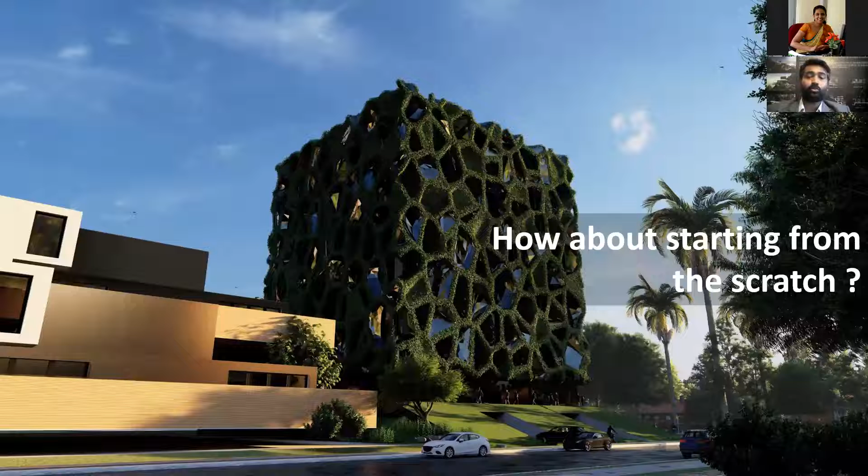That is a question for us to answer. We think as designers, we can start things from scratch if it's a new plot. But when it comes to an existing building, you just have to develop a new concept for it. But somehow you need to think again from scratch. Otherwise, we will be supporting the same system, same strategies and technologies that run us down and create a lot of issues in the future in terms of urban areas as well as cities. And also, there will be no solution for the climate change issue as well.

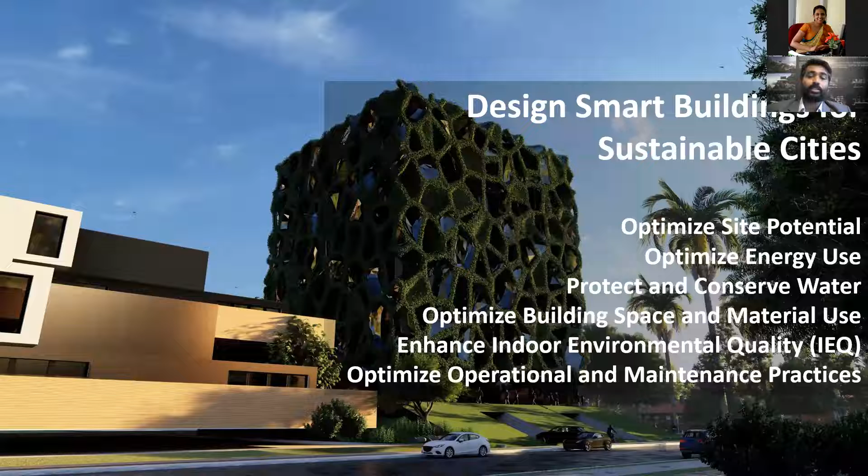These are some smart buildings, designed smart buildings for a sustainable city. These are some of the ways that you can just try them, strategies that you can follow. And I would explain a couple of things with some examples as well.

When designers take a site on as a project, these are the things they have to do to make that project a sustainable and a smart project in terms of it sitting on a sustainable and smart city. Otherwise, the city can have all this infrastructure which is very smart, but the buildings themselves are not smart enough to handle them. The pollution and all these things will again occur, and life inside a city would not work.

So when you start designing, or when you're just trying to alter the current situation of a city, you have to optimize the site potential.

That is very important. The site potential, in the sense, you need to think of the orientation, where your country is located, above the equator or below the equator, how the sun works, and from which months you're getting the most sun and heat, from which side, how do you cut them off, how do you allow natural sunlight to come in - we call them passive strategies - and how do you get natural ventilation to come in instead of having air conditioning all the time. Those things we need to think about.

And optimizing energy use is something we really look into, because we consider some cities which are growing use very little energy, but the cities which have grown use many times more energy than the small cities, in their one day's run.

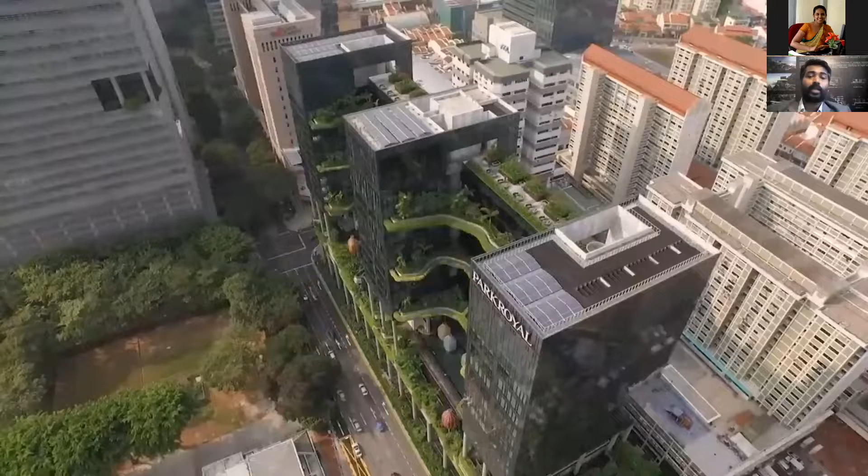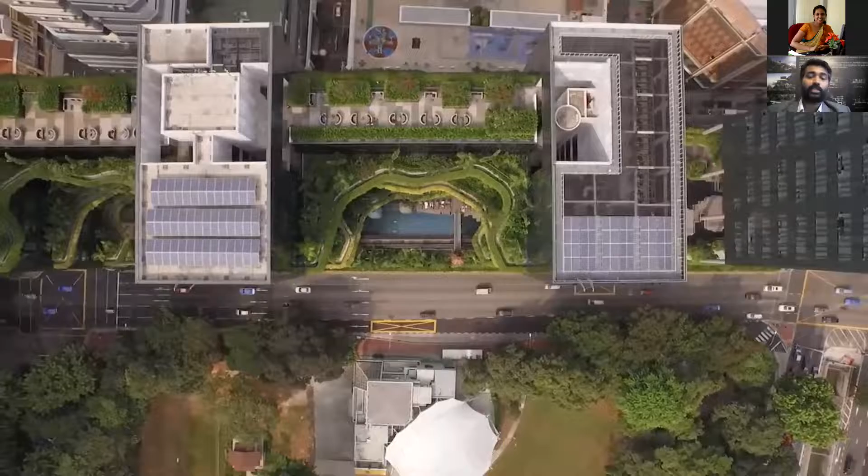The biophilic concept is attaching all these biological and bio-related matters into the building, facilitating them inside the building without removing them or keeping them away. By doing this, you can save a lot of energy when shading the facades, and it gives a lot of mental relaxation for the dwellers, as shown by researchers done around the world.

And you can always go for renewable energy, as shown here. One of the most important things is that the building should not work as a wind barrier. It should let the wind flow across the cities so it can take the heat out of the cities, from one space to another, and utilize the city spaces as well.

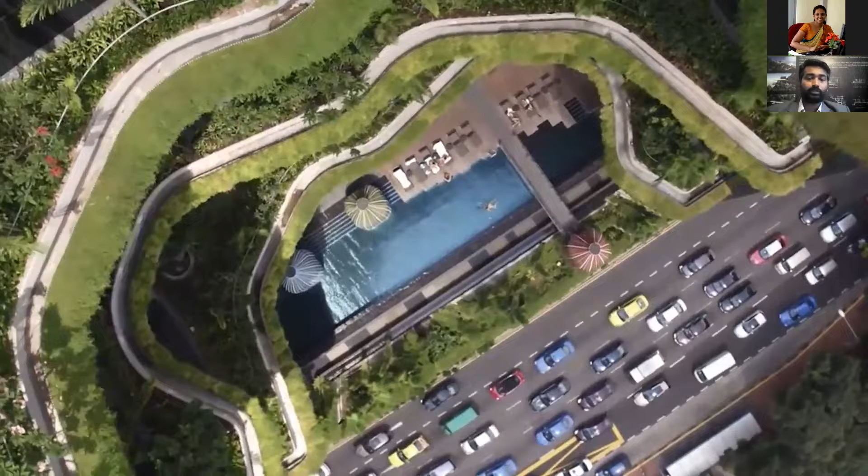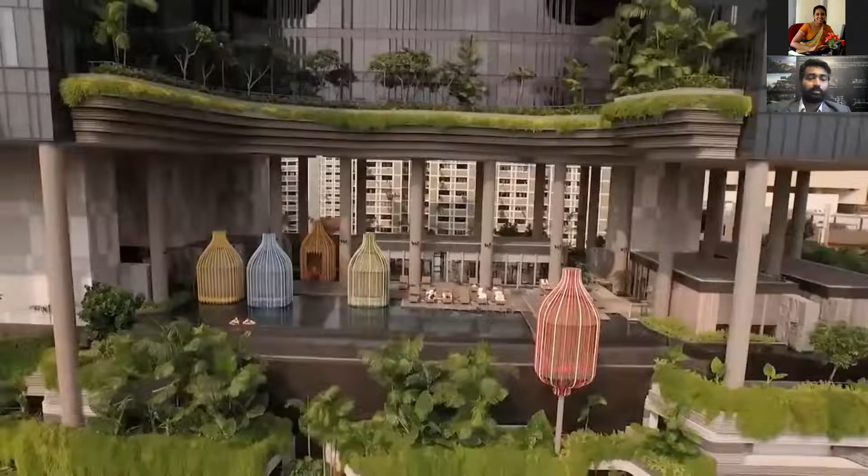So you see all this wind which could flow through the building structure, and that will ventilate it automatically - that's a passive strategy. So the building doesn't have to be fully air conditioned.

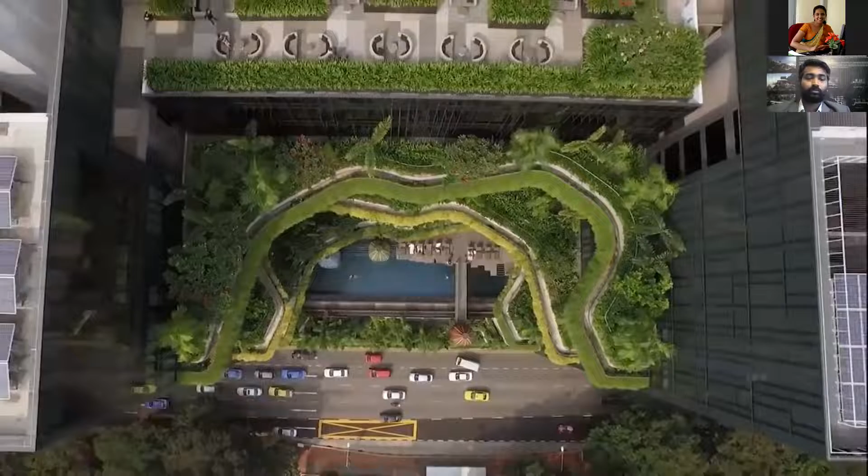Well, I'll move to the next way of approaching the same optimizing of site potential, which is biomimicry. Biomimicry is where we imitate nature, see how nature works, and try to go with the natural process.

Why do we have to do it? Because nature doesn't have any waste. Nature solves all its problems by itself. That is why engaging with the natural process is very important.

The reason why I wanted to explain about World War II and all these historical things is that when people started breaking away from natural connections, problems started because we didn't know how to engage with the natural process and make ourselves part of nature. So we created a lot of waste and issues by ourselves which we cannot solve, and nature cannot support us to solve either. But if we try biomimicry and biophilic concepts, nature can give some support for our cities and buildings to survive and eliminate climate change causes.

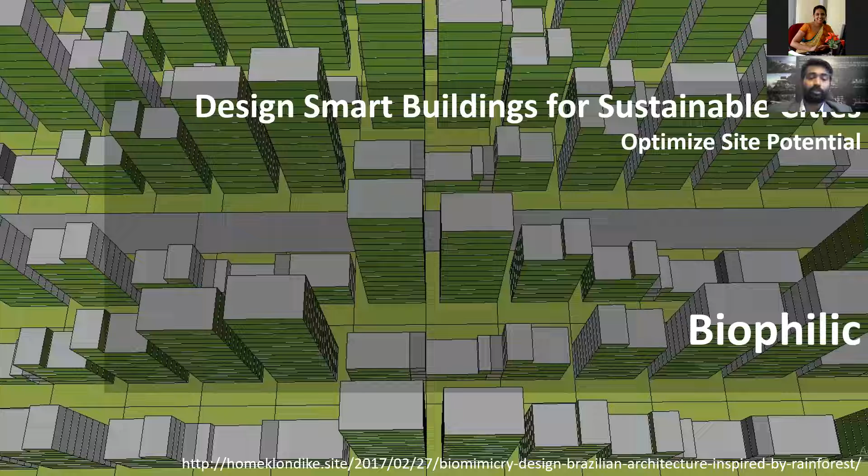And some more examples through biomimicry. As I explained, nature uses only the energy that it needs. That's very good, because if you follow nature, we can get things done with minimal use of energy. Nature fits the form to the function - there's no excess. Nature fits exactly for the function and gets it done, and it's very efficient because of that.

That is why biomimicry is very important to us as designers when we design buildings. Nature recycles everything as well - it doesn't have any waste, it recycles itself. Nature banks on diversity, it supports diversity, and really lets the lives be dependent on each other. Nature demands local expertise - that means nature tries to work out with what is available around and how it can survive by itself. That is why different ecosystems are different in different climate regions.

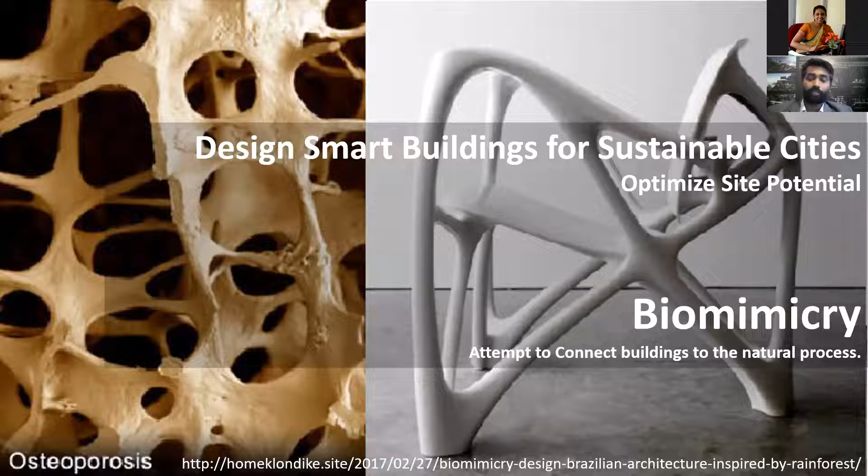These are different technological advancements from research, where we identify a whale which, despite having a huge weight, can move through the water with those two little fins. That means those fins and their design are really efficient, so you can use that design for regenerating energy using wind, since wind is also a fluid, as we consider in generating electricity through windmills.

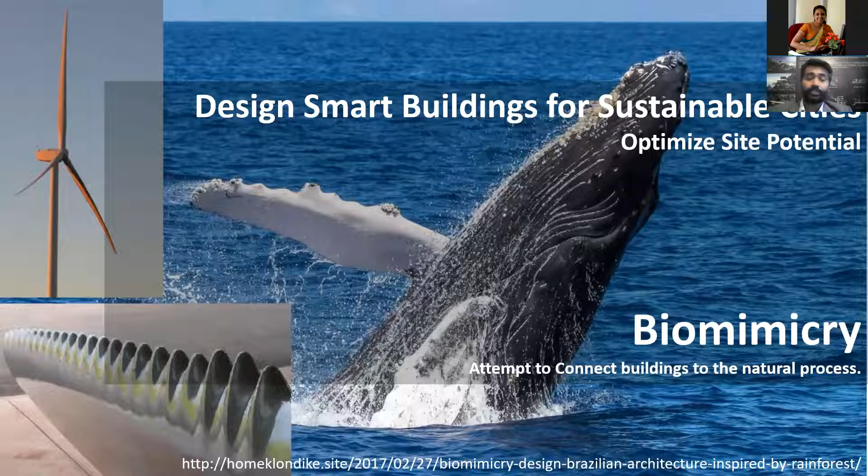Optimized energy use is understood in different ways. Energy gain needs to be minimized first, because windows and walls are the prime sources of gaining energy into a building, and buildings get heated a lot if exposed all around to the sun. That's why high rises have huge energy issues, consuming a lot of energy, and if you put glass all around it, it creates a greenhouse effect and heats inside spaces, requiring heavy investment in air conditioning. So you need to think of optimizing energy use as well.

To improve energy efficiency, different things are done in different places on earth. In Germany, I have seen an example where they used geothermal energy: they dig a well down, pump water down to get it heated, and bring it back up. In another building, they send water down in the summer and bring it back up in the winter, cutting down energy loads in winter when a lot of water heating is needed.

Optimized energy use can also be understood through different facade designs. This building is by UNStudio, and there are buildings in the world where the facade fenestration, the size of the opening, and the shading can be controlled by a centralized BMS system. That system lets the building know which facades to open in the morning and which to close in the evening, getting light and ventilation from sides where direct sunlight isn't coming in, to cut down the heating load.

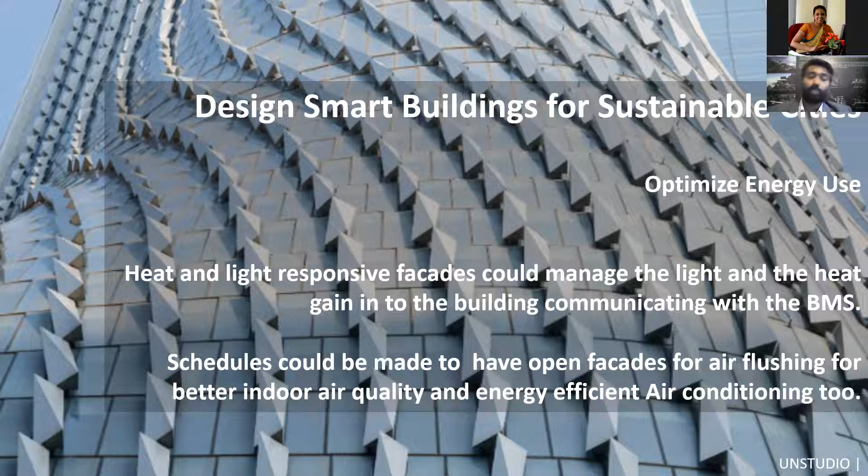When it comes to protection and conservation of water in buildings, it's really critical. One important thing is that we need to go for rainwater harvesting, conserving the water we get free of charge and reusing it, along with grey water harvesting. Sometimes water conservation also works with geothermal energy, heating it up and recycling within the premises.

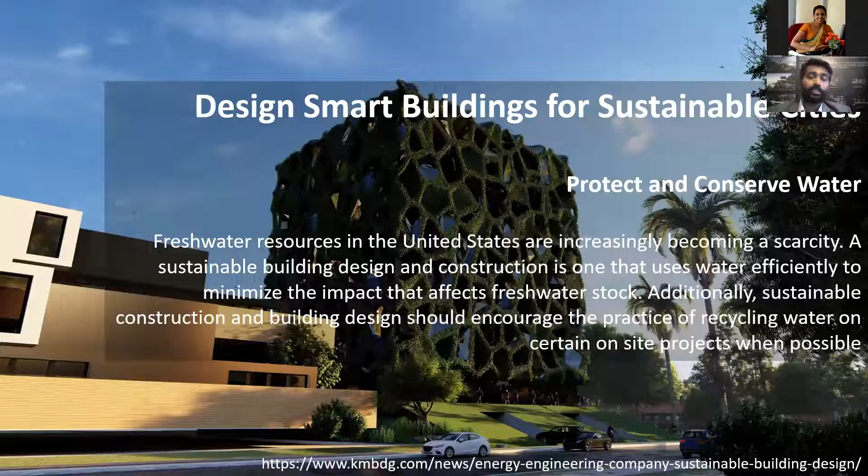You can also use different technological gadgets like faucets, WCs, and different shower nozzles, because they could save 80% to 90% of water depending on their design and the sensations they generate. Most of the time the faucets or taps don't put out a lot of water these days, but they create a sensation that a lot of water has come out by creating bubbles within the nozzles. So the water spreads when it falls into your hand, making you feel that a lot of water has come out and all the soap will go on, but it actually uses very little water.

Efficient irrigation systems matter for landscaping, as well as vertical gardening in buildings. You definitely need a very efficient irrigation system, ideally centralized, so sensors can detect an area where plants are experiencing drought and need water. You can even use local plants for that, because under those conditions local plants can survive with the amount of water available, and you don't have to treat them specifically since they are local.

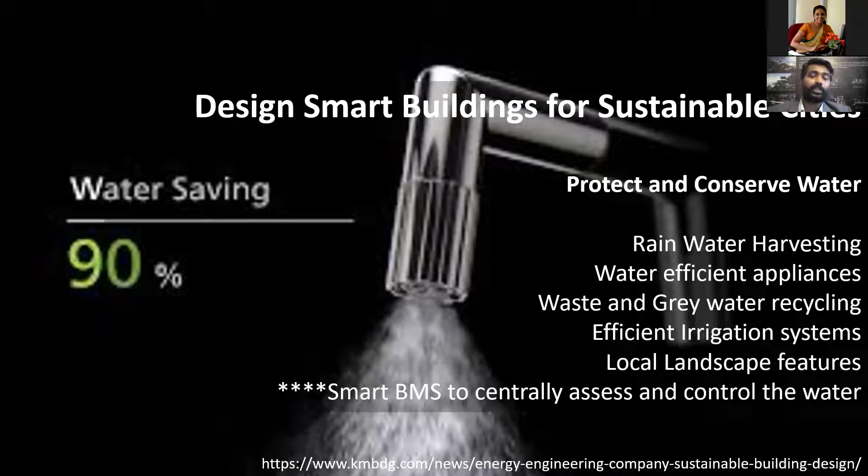And some more when it comes to optimizing building space and material usage, a lot of innovations are going on in terms of building materials and how much you can do with them. There are facades, let's say of a huge building, and if the facade cracks, you need a lot of energy and effort to repair it, and a lot of waste of materials. Now engineers and researchers are trying to develop materials which can grow by themselves and cover that patch, using bioorganic materials.

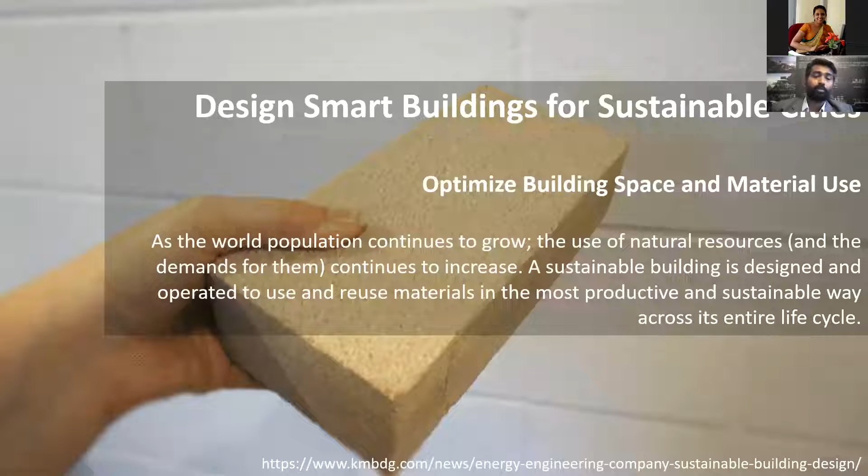This brick is called BioBrick, developed by bioMASON. It started as a startup initiative and now they're trying to go global with it. By doing these things, the brick could control the humidity inside the building, reducing the need for air conditioning. If a brick could do that by itself, we can use less energy to run the building, which is good for pollution as well as fossil fuel use - we call it the carbon footprint - so carbon from building operations would be really less.

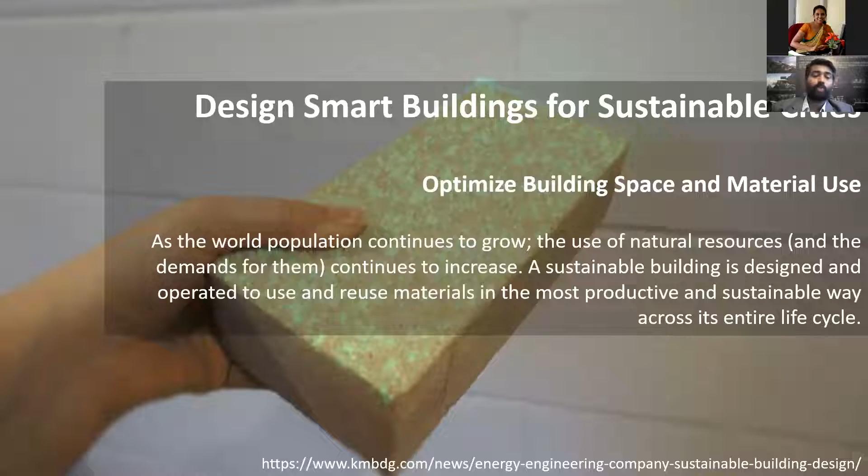When it comes to reusable materials like fly ash in cement, that's also very good, because it's a byproduct of another process, and you reuse it in another process without using virgin materials, so you don't have to disturb nature too much while constructing.

Enhancing indoor environmental quality is another important thing I've mentioned several times, but in this case I'd say biophilicness, letting nature into the space to give a comfortable feeling, as well as controlling humidity inside the building, could also be considered a modern technology and a new concept for building interiors in most buildings.

Optimize operational and maintenance practices. This is a crucial area because many buildings are built with a certain budget, but apparently to run those buildings takes much more effort than the people put into construction. They have huge cost overruns in energy, water, and other processes, so you need to design it properly to optimize operation and maintenance practices as well.

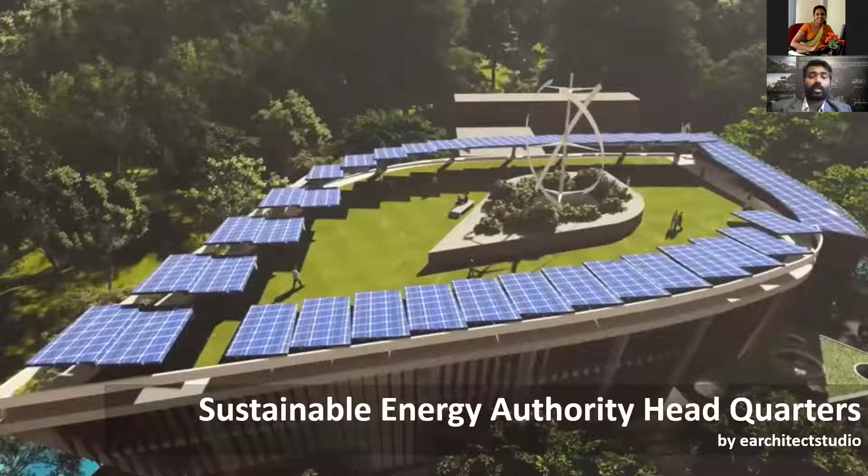I'm going to show you one of the projects we have done, the same one I mentioned in my CV, which is the Sustainable Energy Authority headquarters. You will see how we designed this building and achieved different parameters to make it an energy sustainable building. The secret of this building is that it's shaded throughout the year on all facades, every single window.

So there's less heat coming in, and it can flush at night when the air is cooler, so when the building starts in the morning it has cool air inside, and very little starting energy is needed for air conditioning.

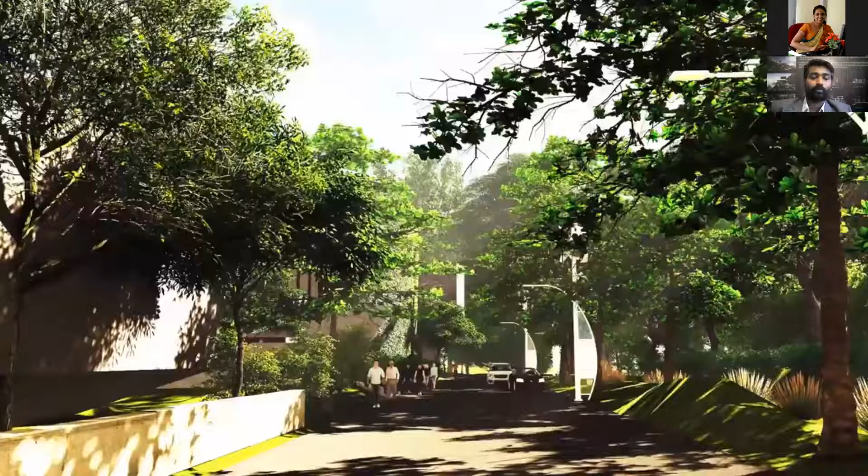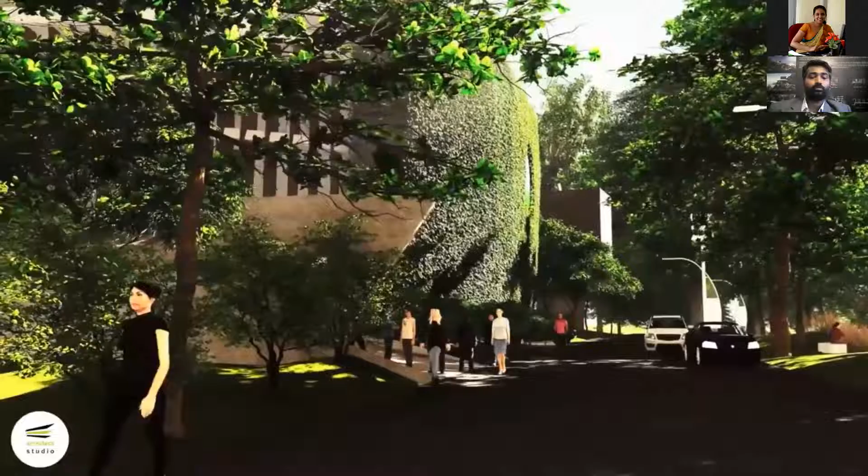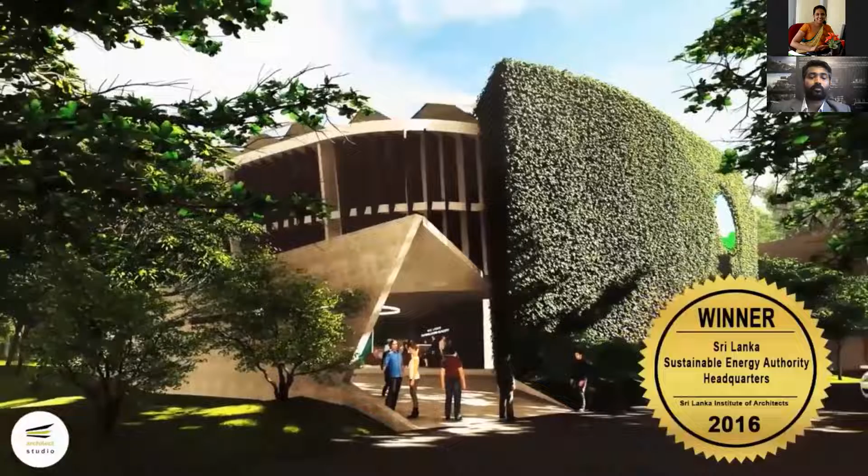The building itself should set an example of a clever passive solar design - 365 days under shading - with clever use of materials and systems to reach near zero carbon footprint. With its unique form for its purpose, the Sustainable Energy Authority headquarters won first place in a project competition among well-established practices, expressing capabilities and opportunities such as solar power generation, daylight, rainwater harvesting, and similar environment-friendly systems.

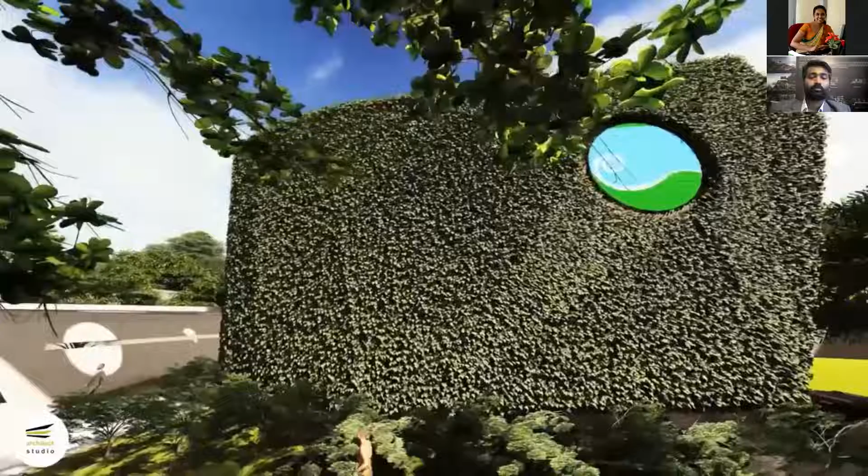The proposed site is at Battaramulla, in close proximity to the Sri Lankan Parliament, and the region is becoming the full-fledged administrative capital of Sri Lanka.

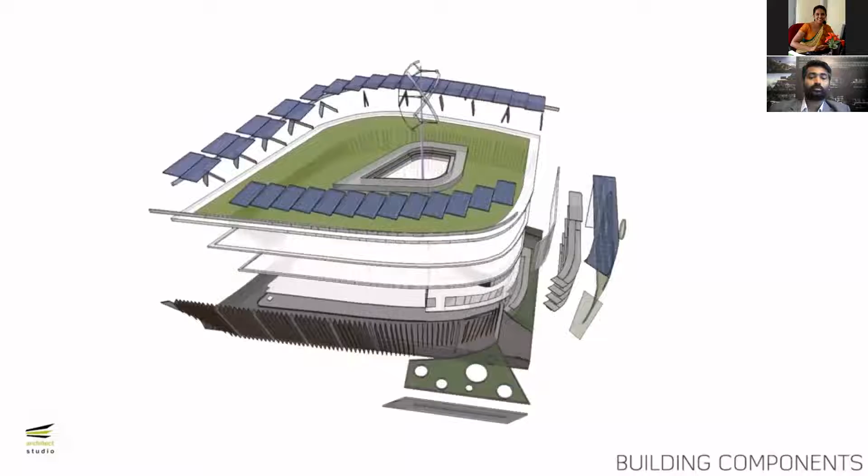The cantilevering building form and facade elements are designed to welcome natural ventilation at moderated levels. Furthermore, to avoid the microclimate air getting heated, the driveway paving combines soft and hard landscaping. The central courtyard improves air circulation, and the wind turbine supports the stack effect by extracting heated air from the courtyard.

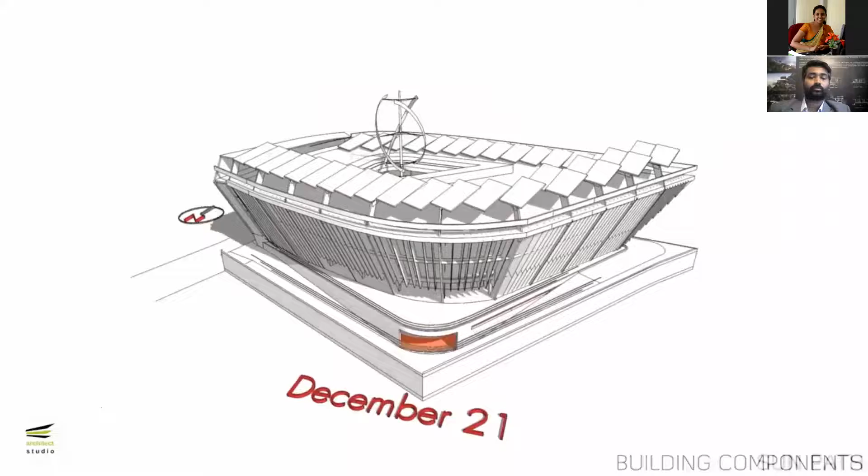The building form is designed to receive no direct sunlight, so the interior is shaded throughout the year. The leaning building form, cantilevering floors, and vertical fins ensure solar shading throughout the year, on any day.

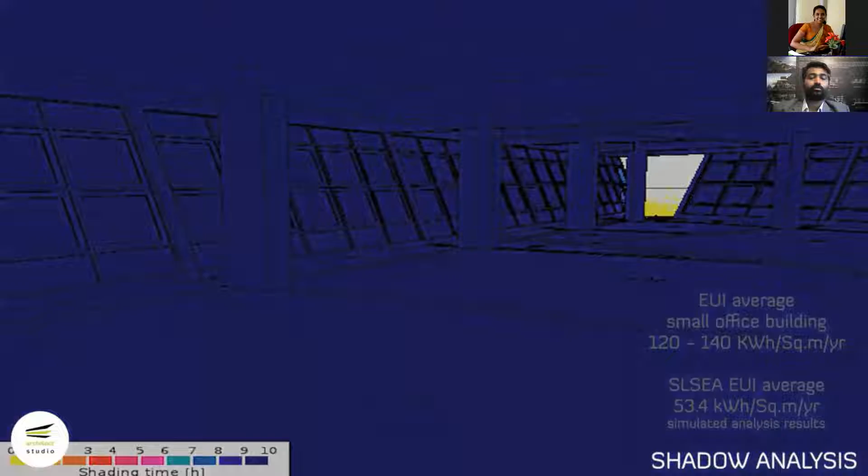According to analysis by LJ Energy, referring to the Building Energy Benchmarking Report 2017 by BCA Singapore, the energy use index of an average small office building ranges from 120 to 140 kilowatt-hours per square meter per year. The estimated energy use index of the proposed SLSEA headquarters building, without parking spaces considered, is 80 kilowatt-hours per square meter per year, and with parking spaces considered, it is 53.4 kilowatt-hours per square meter per year.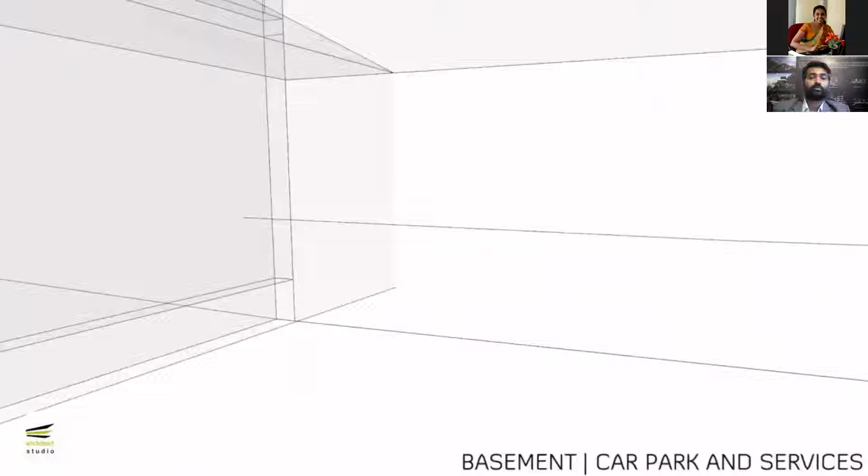The basement is used for effective stack parking and to contain all the mechanical equipment required for air conditioning, water recycling, and electricity supply. The space is naturally ventilated and lit through the central courtyard.

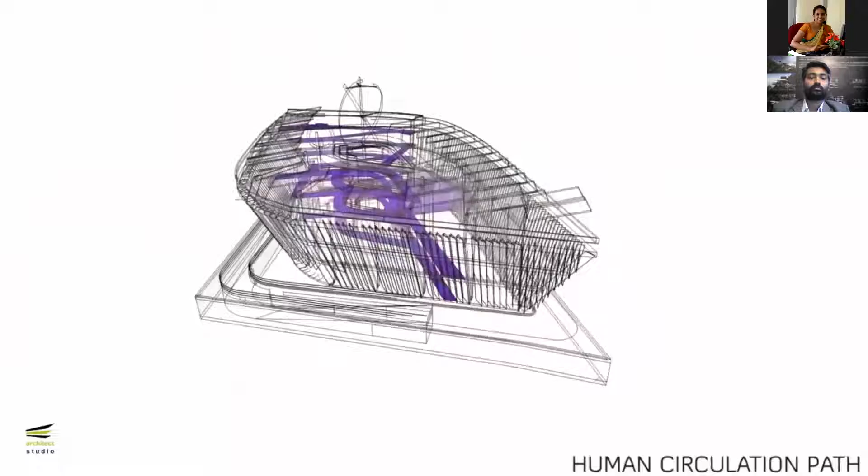Minimum human circulation paths in the building: percentage of circulation spaces as a proportion to the built-up area is 12.1%. As a passive strategy, the ramp which connects all floors creates an informative avenue with interactive user interface, which improves the knowledge among visitors regarding the opportunities and potentials of clean energy. Further, these access points have the potential for dedicating different user categories depending on the need of access, avoiding congestion in circulation spaces.

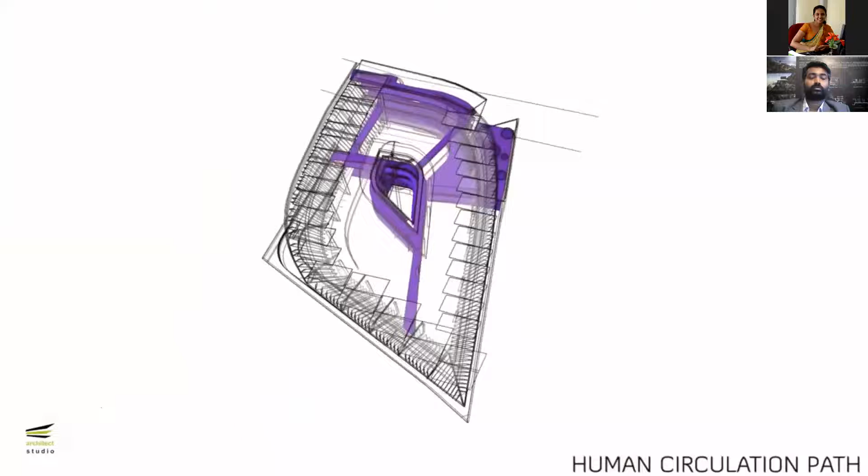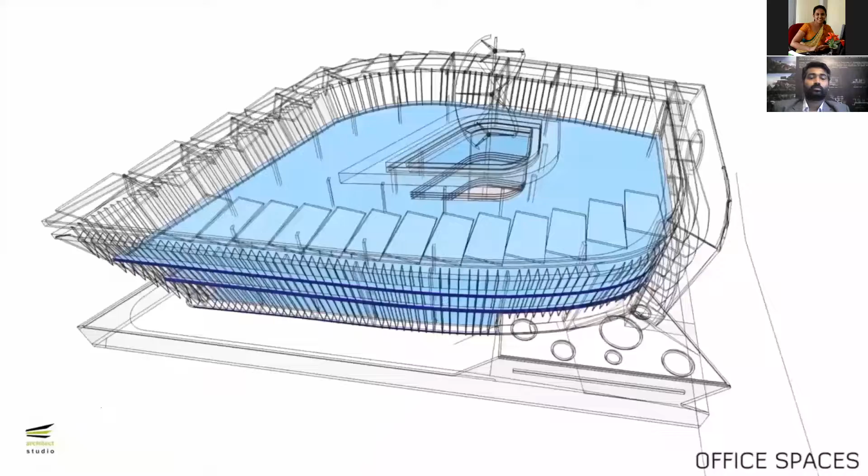Interior design is to maximize daylight harvesting while arranging the spaces in a radial manner with light color themes. Since most spaces in the building are lit through daylight, artificial lighting is to be considered only for additional working hours and to respond to climatic variations. At these times, the interior will be lit with low-energy task lights for required areas to minimize energy demand.

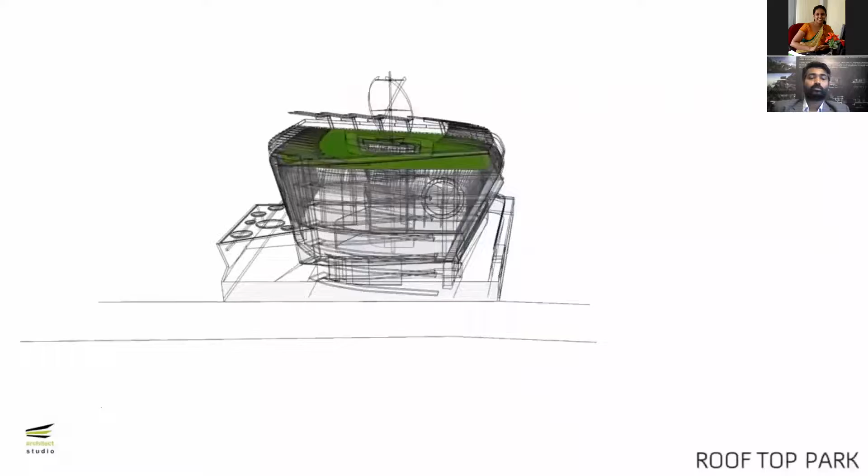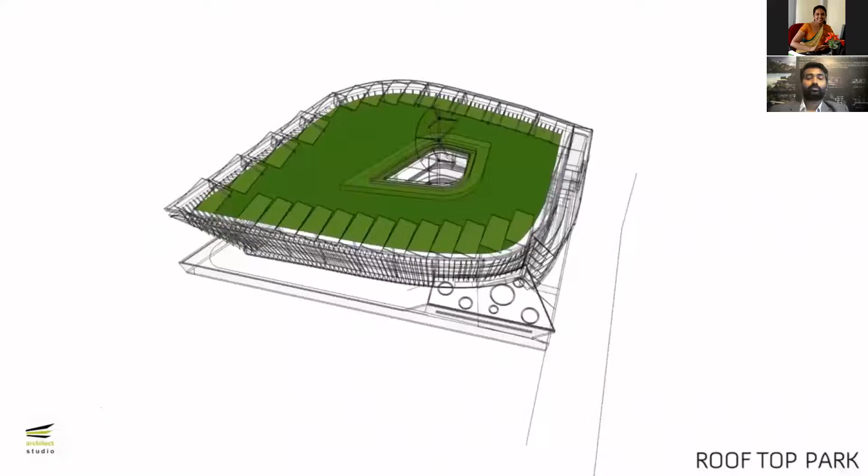Exhibition space at terrace level, which improves the knowledge among visitors regarding the opportunities and potentials of clean energy. An animated wind turbine energy element serves demonstration purposes as well as a live object which connects all the floors and even the terrace level exhibition space.

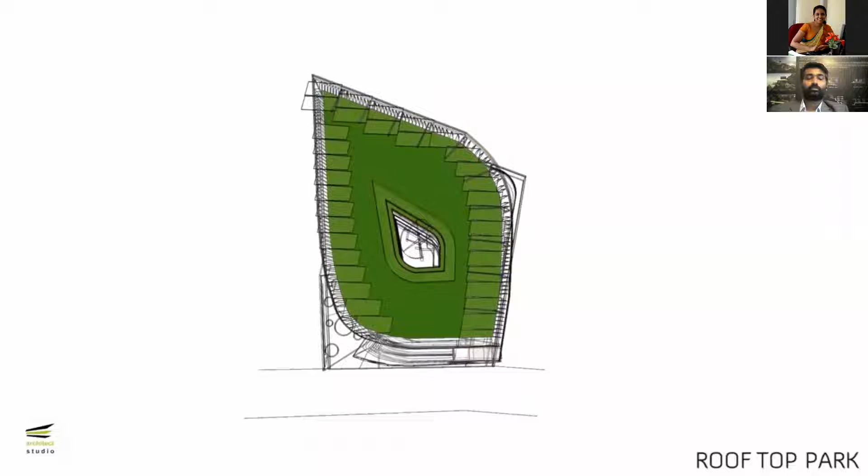West-facing ramp. As a passive strategy, the ramp which connects all floors creates an informative avenue with interactive user interface, which improves the knowledge among visitors regarding the opportunities and potentials of clean energy.

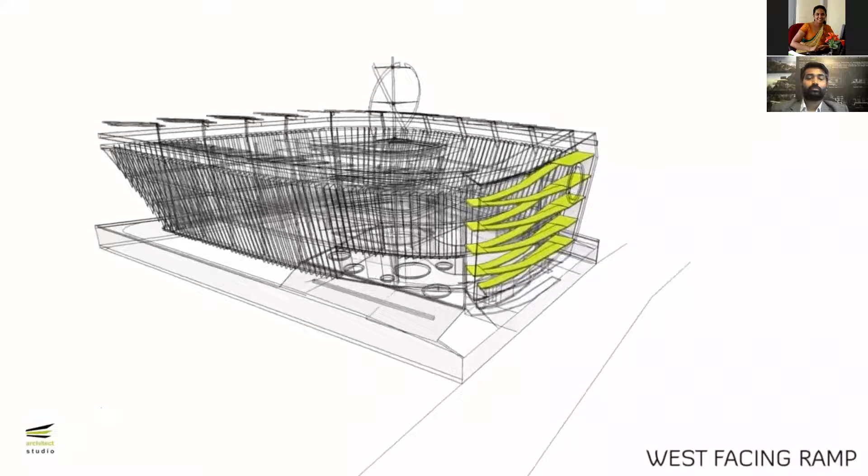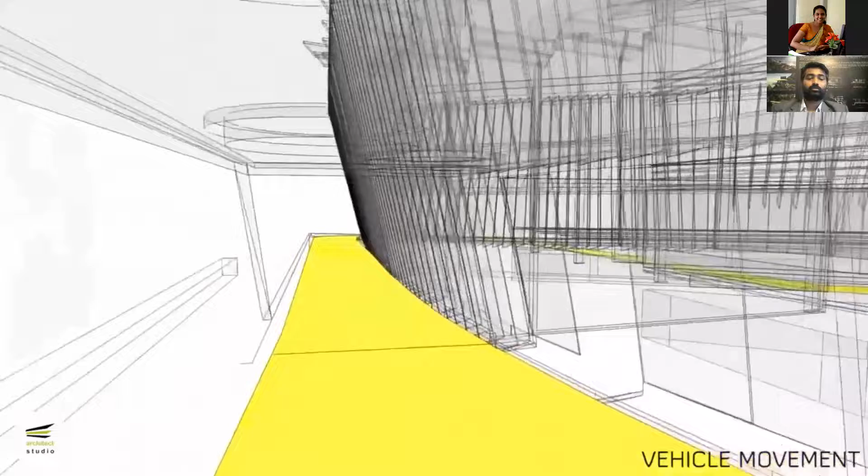Leaning building facade. Each facade has its unique leaning angle, catering to shaded spaces from above floor slabs depending on the solar angle.

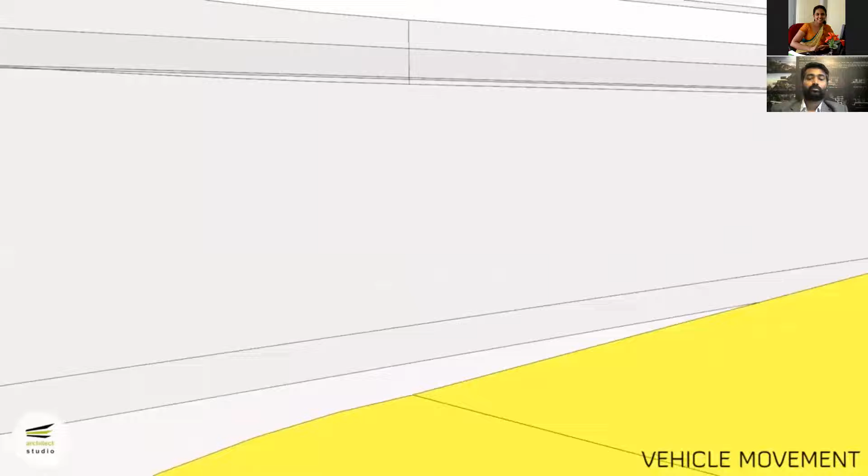Vertical fins and windows. Fins are used to cut off direct sunlight, and window fabrication uses low E-value fabrication systems which are automated and climatically controlled.

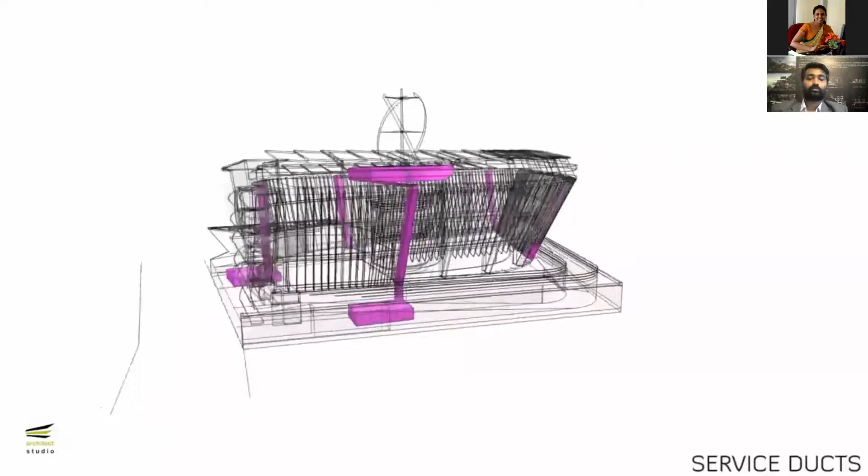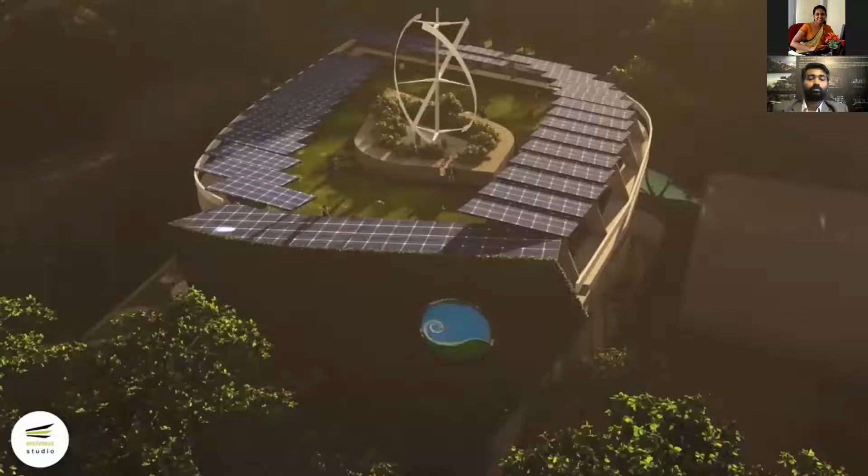The building shall use construction material having low embedded energy, and materials produced by environmentally sound methods which will emit the least amount of harmful gases and waste. Without differentiating between the natural environment and the built environment, the building will feature the possibility of becoming part of the natural environment by blending with the surrounding vegetation and soil structures.

Green power and self-containment: the building will attempt to use natural lighting and ventilation and generate its own green power as much as possible, so that there will be marginal exchange of energy between the outside and the building.

The building will use very little external energy and will make maximum use of resources by employing the latest efficient technologies. Use of utility water and other material resources will be kept to a minimum by employing technologies such as rainwater harvesting, recycling, and reclaiming of waste generated by occupants. The proposed building could employ a state-of-the-art building management and access control system, including occupancy sensors, etc., to keep energy demand to a minimum.

Excuse me, Mr. Suresh, you are muted. Sorry for that. Okay, thank you.

Concluding my presentation, I wish to inform that there are a lot of advancements in software as well these days. The software could manage the building while it is designed, as well as manage new design forms and new design elements, and do simulations for energy as well as structural compatibility, and come up with new

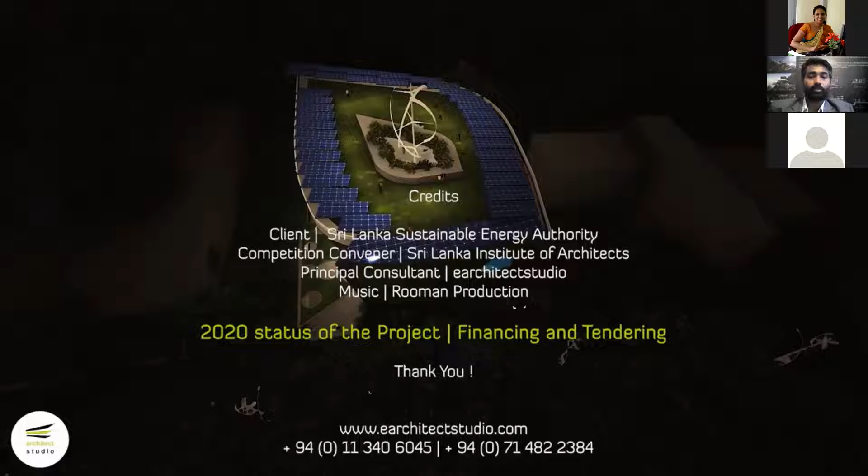Thank you very much, Mr. Suresh. Thank you very much for a very impressive and very interesting presentation.

And now I will open the door for questions. I am sure the audience may have questions. So let's start the panel discussion now. Let's open the door for the audience. So if there are questions from the audience, you are very welcome. So please bring your questions to Mr. Suresh now.

Well, I will start asking some questions then. Mr. Suresh, you mentioned about the use of geothermal energy for buildings. How do you see the potential of use of geothermal energy in Sri Lanka?

I'm not quite sure how I can answer that question, but I can share one of my experiences. I happened to be in Germany in 2019 under a German program where they explained everything about how geothermal energy works in their country, because they have a super winter and a super summer as well. But we have not, I don't think we have come across any research done on this here. If we do a proper research and can establish or ensure that it will work, maybe that's a possibility for us as well.